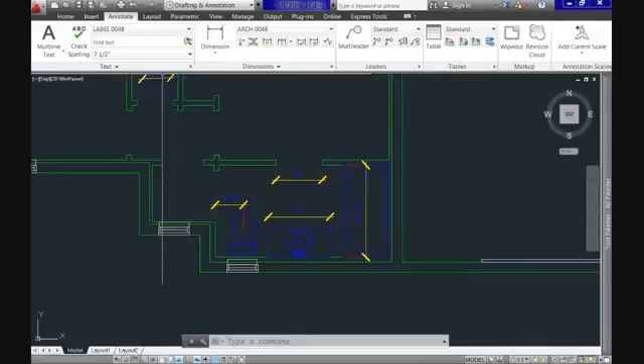Today we'll see how to create your own text, dimension, and multi-leader styles manually. In our last tutorial we covered annotations and explained that these are controlled by means of styles. Our challenge today is how to make those annotations display correctly when our plans are ready for printing on paper.

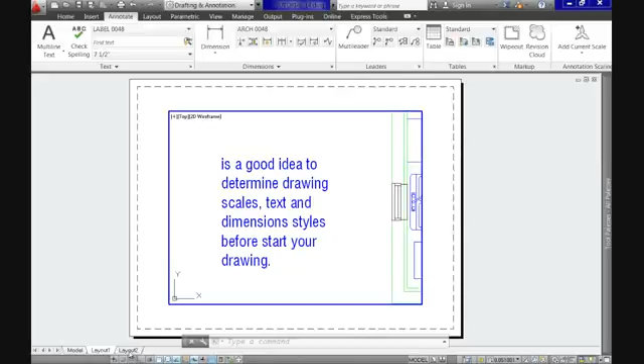As we all should know, we draw in model space where objects are typically drawn at actual scale. But then we have to print or plot those drawings, and either we reduce or increase the size to fit the paper in which they are presented for production or construction purposes. The main issue is that although we have to scale our drawing, the annotations on it like text and dimensions should be kept at a fixed size on the paper for consistency.

A general accepted standard is that regular text should be 1/8 of an inch or 3 millimeters high, and for titles, headings, etc., 1/4 of an inch or 6 millimeters high. Additionally, most construction or production documents present different parts of the drawing or different sections at different scales. The challenge is how we make annotations appear the same size evenly when our objects are presented at different scales.

There are two main ways to enter and adjust our annotations in CAD. Number one is manually, and second, annotative. We will cover annotative in the next video, and now we'll focus on creating them manually. The first step should be determining the scale factor. And you might say, what is that?

A drawing scale factor is basically a ratio between the size of the objects in model space, which should be at full scale, and the size at which it will be printed in paper space. Let's say, for example, we might use a scale of 1/2 of an inch equals 1 foot, or 1 inch equals 60 feet.

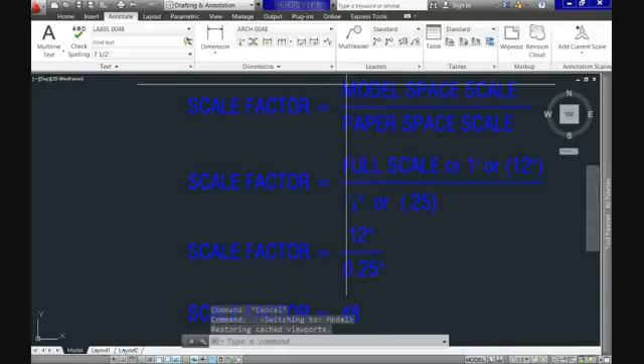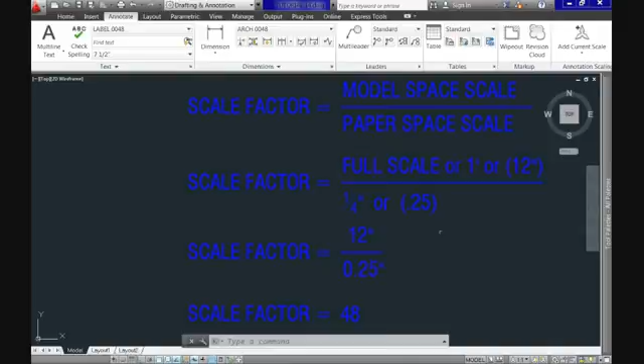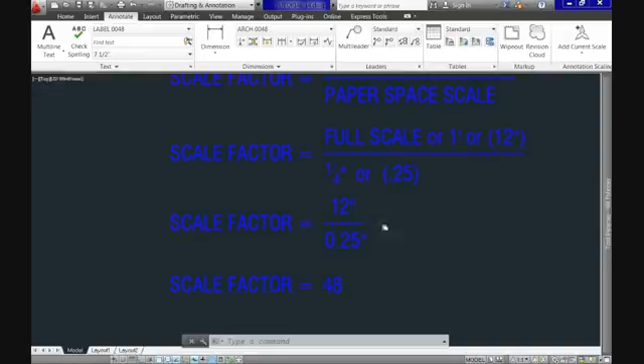Scale factors are calculated by dividing the scale in model space, which should be, remember, full scale, by the paper space scale. So, for example, if you will print your drawing at 1/4 of an inch equals 1 foot, in this case, 1 foot or 12 inches is your model scale, and 1/4 of an inch or 0.25 inches is the scale for the paper. Then we divide 12 by 0.25 and we get the number 48. This is the scale factor.

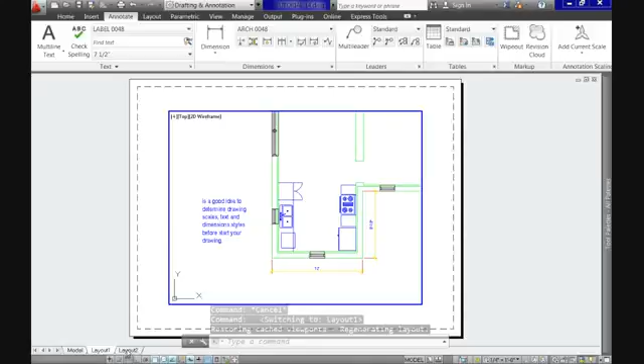You will use it for this particular case because everything drawn at full scale in model space will be shrunk 48 times to be displayed in paper space at the scale of 1/4 of an inch equals 1 foot. So in other words, this means our model space is 48 times bigger than our paper space objects at this specific scale. Our challenge now is to create a dimension and text style that is easily seen when we're working in model space, and then we'll plot at a standard height of 3 millimeters or 1/8 of an inch.

Now let's jump to create our own text style. Move to the Annotate tab in the ribbon. The first panel is Text. And now please click on the diagonal arrow here. When you click on it, the Text Style dialog box or manager will pop up.

On the left, you will see the available styles. All drawings should have by default annotative and standard styles. But we can also create user-defined styles like these two that I have here, dim and label 48. Once we create ours, it will also display here. Now on the right, click on the button New, so we start creating our own style. Once clicked, the new name by default is going to be Style 1.

My suggestion is to use a descriptive name to indicate what it is for. For example, I'll use here the name title 48 to indicate that it has a factor of 48, and title because it is what it's going to be used for. When you hit OK, it will appear automatically in the styles area. The most important part now is the height. With the formula I already gave, we found the drawing scale factor to be 48, right?

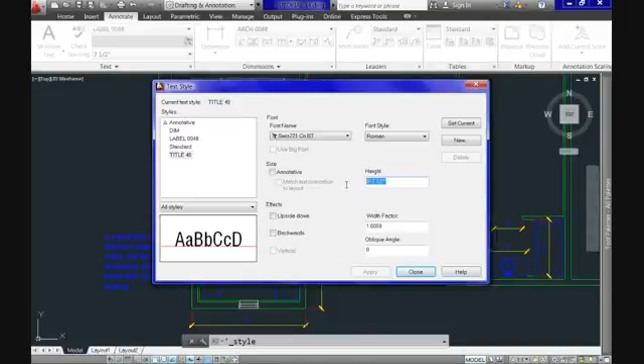Now, if we multiply this number or ratio times the height of our intended text in paper space, in our case we want it to be 1/4 of an inch, which is 0.25 inches high, that equals 12 inches for the height we have to specify in model space, right here. So to wrap up this concept, you determine scale factors by dividing model by paper scales, then multiplying the result by the height of the annotations you want in paper space to arrive at the right height you need to specify here. Now let's visit some other features.

As you see in the font area, using the drop-down menu, you can select the font you prefer. In my case, I'll use Times New Roman. As you see down here, we have a preview of the style, so use it to see if you like it or not. Now to the right, we have the font style. Pull the menu to see that this refers to bold, italic, etc., and try it to see the results on the preview.

As you notice here, this checkbox also indicates that we can make our style annotative, and for now we won't use it.

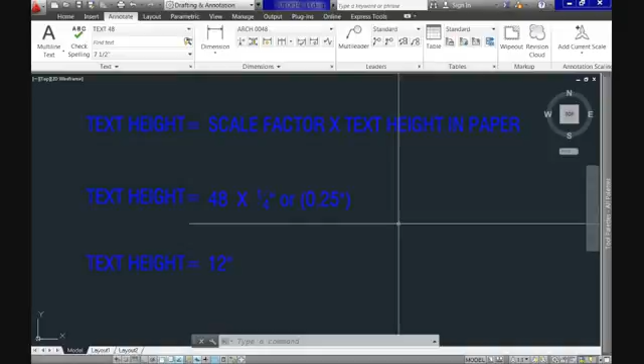Finally, let's use our new style by calling the Title 48 style. Now use the multi-text command and let's write Floor Plan, centered below our plan as a title. Now let's do the same but with the dimension styles.

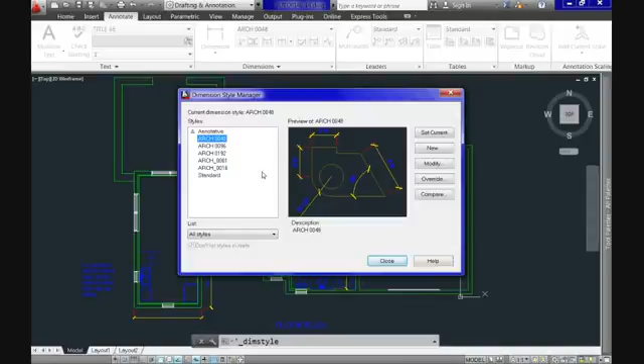Click the diagonal arrow and the dimensions panel or manager will come up. Like with the text styles, on the left we'll have the available styles. The annotative and standard are the defaults, and the rest are user defined, which means I created them. On the right, we have some options like comparing some of them or modifying an existing one. In our case, we'll click New to start a new style.

We have 3 options from the bottom up. With the option Use For, we can select what we want it for. Normally we will use it for all dimensions, although you can use it for specific ones like angular dimensions or something else. But let's leave it as all dimensions.

For now, we won't touch annotations, so we leave this option unchecked. The next one is Start With, which indicates to CAD what existing style your new one will be based on. Although CAD automatically selects the last one you were using, you can select a different one from the menu. And finally, we can select a distinctive name for our new style. In my case, I'll use Arch 48.

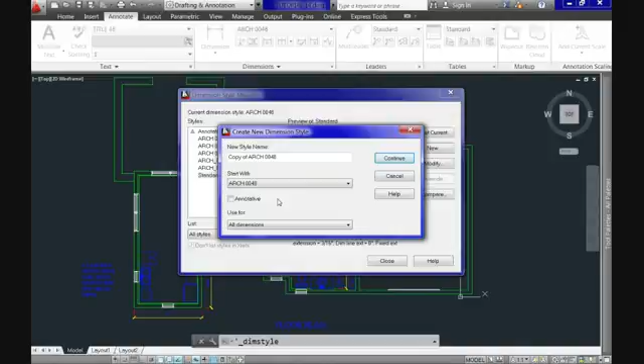Now to start creating the style, we click continue, and this is what we got: a dialog box with plenty of options to specify even the most insignificant details. Let's visit the most used ones.

On the Lines tab, we can specify color, line type, line weight, distance from origin, and other details. You can treat them separately, meaning the extension lines can be independent from the dimension line. While changing those, you can assign them different colors. You can preview all the modifications on the right upper corner.

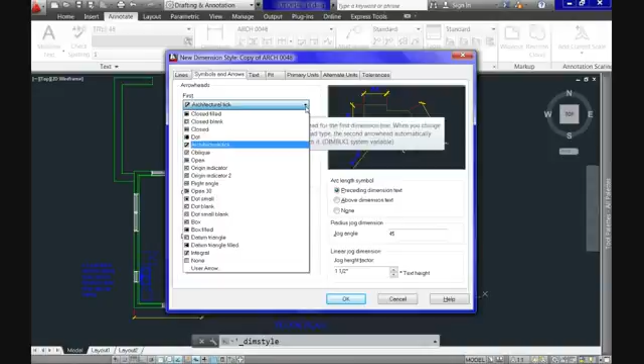On the following tab, Symbols and Arrows, we can specify what type of arrowhead you want. You might select from the menu, as in my case, the architectural tick for both sides of the dimension line. Below, we can specify the size of the arrowheads or the ticks.

In the following tab, we have first the Text Appearance option. We can specify the text style, color, height, etc. Any changes you add or remove to the dimension style will be visible on the preview immediately, like now when we check the Draw Frame Around Text option.

You can see it here. An interesting feature is that we can open the text style editor from within the dimension style by clicking this button and modify an existing one or create a new one from scratch.

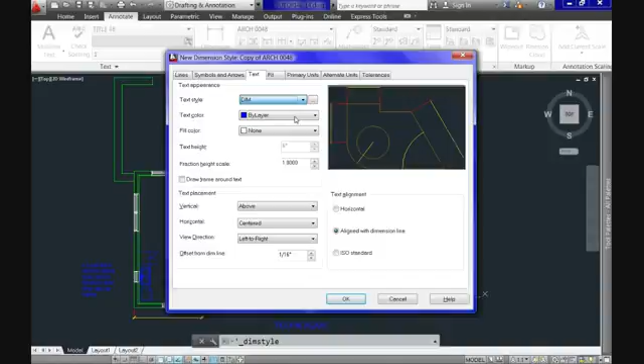Now, close that, back in the dimension style editor, normally you would select from your existing text styles one because you want the height to be the same for both your text and dimensions. Notice that when you select one, the height gets grayed out because the height was already predefined when you created the text style. On the Fit tab, we have plenty of options to select if there isn't enough room to place the text for the dimensions properly.

Normally, you would let CAD decide for you, so the first option is the recommended one. On the text placement, it's completely up to you.

Moving on to the Primary Units tab, we have the option to select the main units. You have plenty of formats to select from, starting with scientific, decimal, etc. You can also specify the precision of the measurements, what type of fraction format you want, and up to where you will round it up.

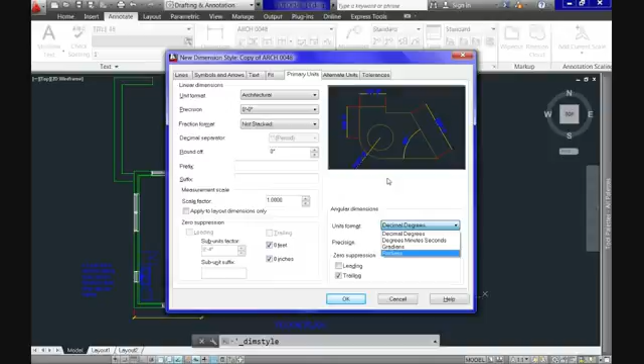Additionally, you can select how you want the angular values expressed. Normally, we'll leave it at decimal degree. On the following tab, we normally don't use it, but you can also have values expressed with additional units of measurement, like in both engineering and architectural, or in both inches and millimeters.

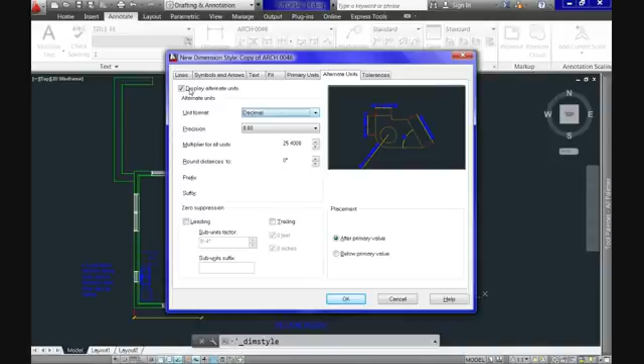Again, this is not common, as well as the tolerances in the last tab, which will depend on the specific discipline you are drawing for. Here you can select the method you prefer, etc. While visiting all of these tabs, you will notice that some options are not available, but once you're satisfied with your style, you can click OK, and it will be the current style in the Annotation tab of the ribbon.

The same is true of leader styles. Let's move to the tab and click on the Style Manager arrow. A similar dialog box will appear, and similarly, you can modify an existing style or create a new one. When clicking New, it will give you the same starting options as before.

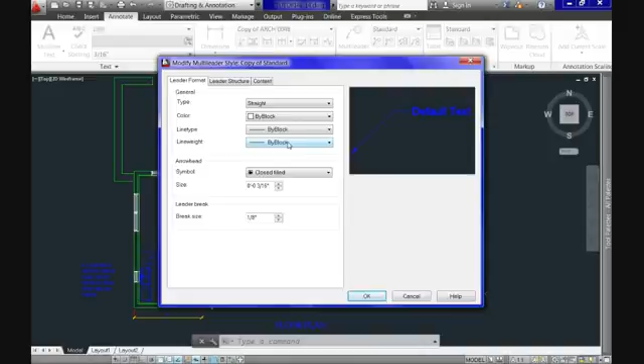Just click Continue, and we end up in the dialog box to create or modify the style. It will only have three tabs. The Leader Format tab will give you the ability to define your leader in terms of color, line type, line weight, size, type of arrowhead or tip, etc. In the second tab, Structure, you can give specifications for the scale, the constraints, and the landing settings for the leader.

In the Content tab is where you'll find more options. These are related to the appearance of the leader in terms of style, color, angle, height, and justification for the text to be used. There is nothing to lose by trying some of these options on your own, since the process is very similar to the ones we just saw with text and dimensions.

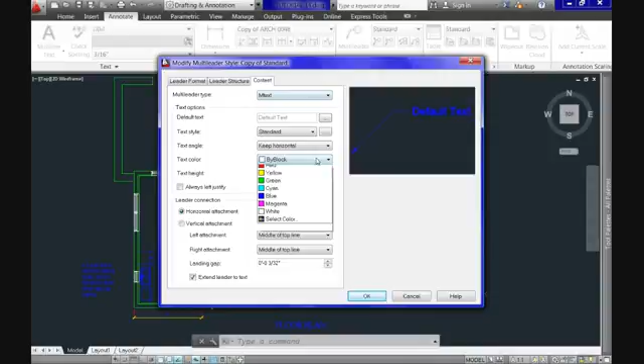After that, all we do is click OK to close the editor, and again this leader style will become current in the drawing. Now we're done with what we're talking about. For the next video, we will cover the second method, which is annotative dimensions, which simplifies the entire math in the process.